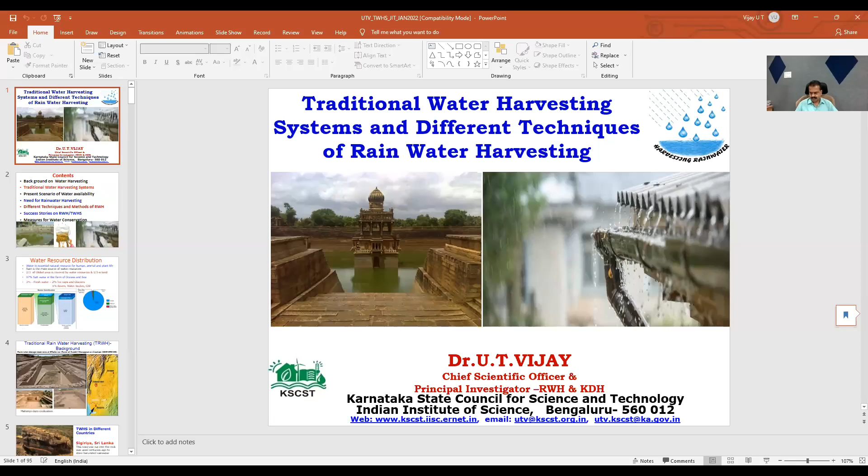Okay, thank you. So, good morning to all of you. I'm Dr. Vijay from Karnataka State Council for Science and Technology. First of all, let me thank the JIT Institute of Technology for giving me this opportunity to participate in this prestigious refresher course program.

Before starting my talk, let me introduce my organization, Karnataka State Council for Science and Technology, which is one of the first state science and technology councils to be set up in the year 1975, located in the Indian Institute of Science, Bengaluru. Since inception of our council, we have been serving the state by using science and technology interventions for the development of the state, both in rural as well as urban areas, under the main sectors of water, energy, education, health, ICT, geospatial technology, digital heritage technology, and so on.

Especially under water, we have been serving the state by carrying out a lot of field investigations, and using advanced technologies, we have been giving a lot of scientific measures and suggestions to the state in the development of both surface water as well as groundwater.

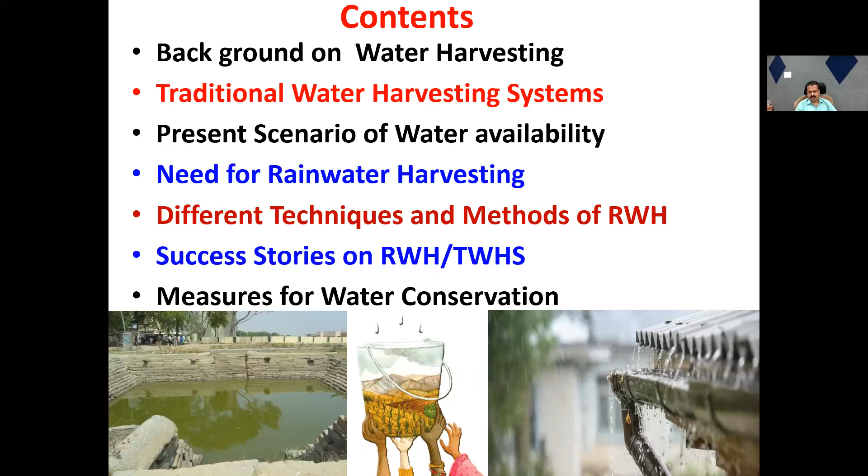So friends, as we all know, water is important and is an essential natural resource used for various purposes for all creatures on earth, both animal and plant life, including human consumption, apart from various other uses. As we all know, rain is the main source of water resource.

First, let us know the water resource distribution on our earth planet. If you see our globe, 2/3 of our area is covered by water and 1/3 is land. Out of the water resources, 97% is available in the form of oceans and seas, that is salt water only. 3% is available as fresh water. Out of that 3%, 2% is in the form of ice caps and glaciers, and 1% is fresh water available in rivers, water bodies, and groundwater. With this 3% only we have to struggle, and that too within 1% of fresh water we have to meet all our needs.

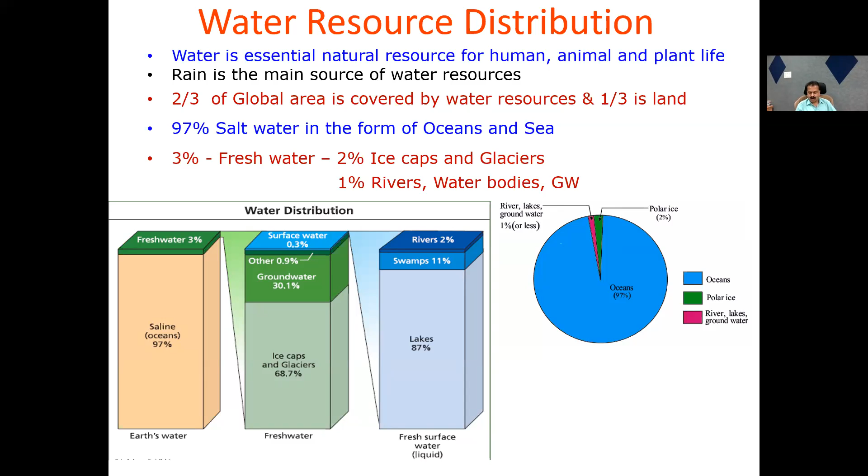If you go back to the inception of our civilization, water harvesting is not a new technology or any special or rocket technology. It's a very simple way of harvesting rainwater - whatever rain falls on your place, you catch it, store it, and use it for various purposes. It did not start yesterday or the day before; it started with the inception of our civilization.

You can see these structures, which were constructed by our ancestors in our civilization. Even today we can see this kind of structures in the Harappa and Mohenjo-daro civilization, which took place at the border of our country along with Pakistan and Afghanistan. Even today you can see this kind of structures. So these pictures show that water harvesting was present since the inception of our civilization.

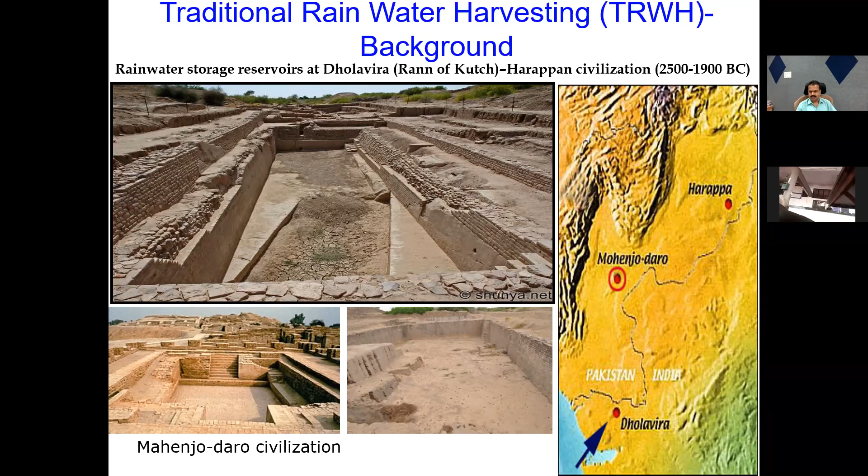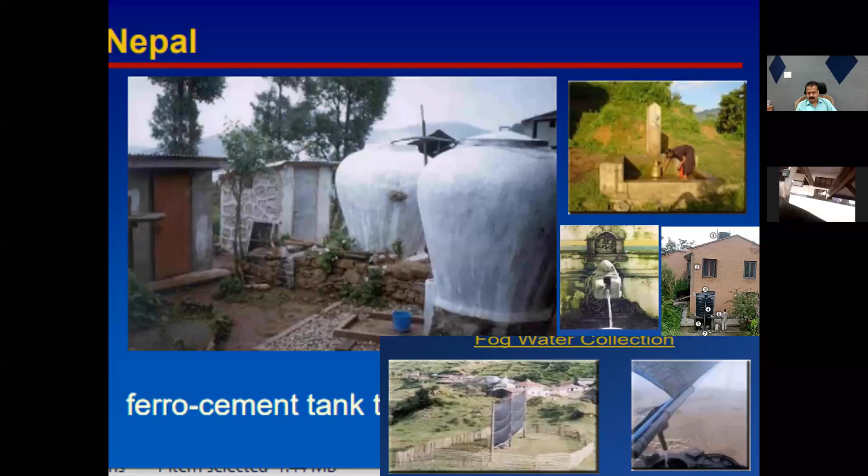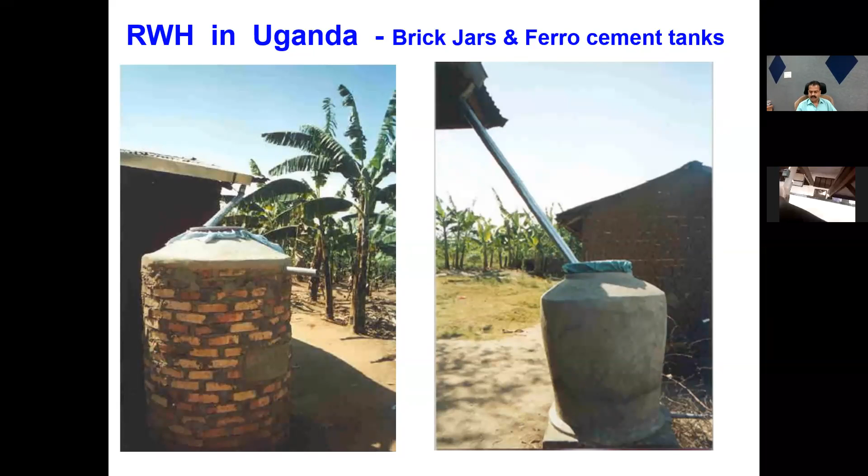In Nepal, they also used to harvest water naturally, even collecting water from fog. They used to collect water from fog and supply it to village settlements lying downside the hillocks. You can see these pictures, which show methods used by Uganda, using brick jars as well as ferrocement tanks. Earlier they also used ferrocement jars as well as wooden stems lined with lime mortar.

So let us understand what traditional water harvesting systems are. Basically, these systems were constructed to store water for domestic, religious, and irrigation purposes, along with recharging groundwater. These are environment-friendly structures constructed using locally available material with traditional knowledge, crucial to the overall ecosystem. These structures were also constructed as flood control measures, and also as monuments to showcase the richness of tradition, heritage, architecture, history and culture of the region.

The temple tanks, kalyanis, pushkaranis, or stepped wells, constructed near temples, played very important roles, especially in the social, religious, and cultural activities of our Indian tradition. Annual float festivals, Teppotsava, light festivals, Deepotsava used to be conducted as part of socio-religious activities near these water bodies. In India, this is prevalent from almost Kashmir to Kanyakumari.

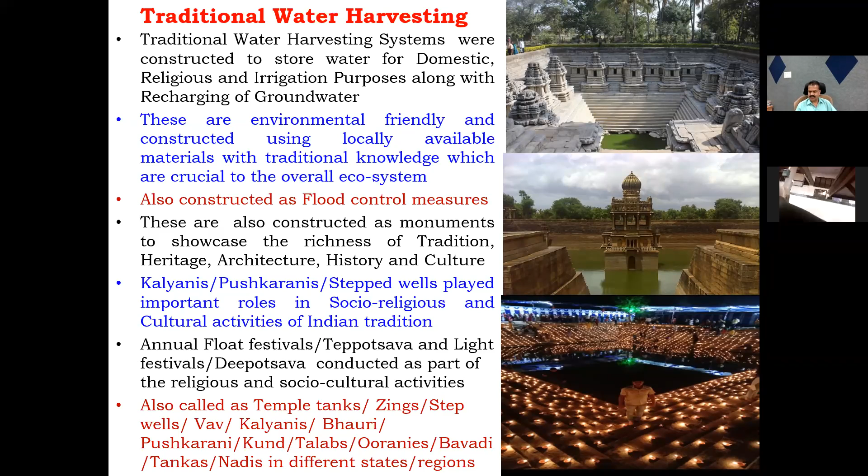These structures are called by various names - Zings, stepwells, Vav, Kalyani, Bhauri, Bauli, Pushkarani, Kund, Talabs, Ooranies, Bavadi, Tankas, Nadis - in different states and regions. You can see from this picture that it is widely prevalent in all parts of our country, starting from Jammu Kashmir to Kanyakumari.

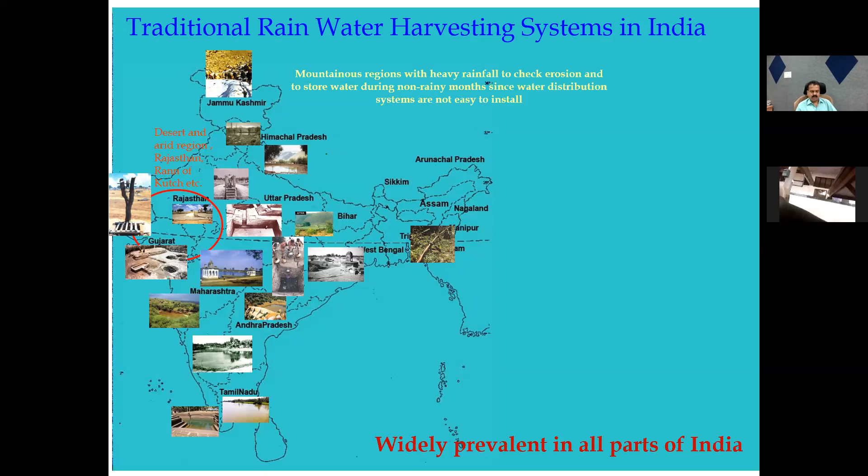Especially in Himalayan regions, they used to collect water from glaciers and store it in this type of tanks, and they used to use this water for domestic as well as irrigation purposes.

Then coming to our Rajasthan as well as Gujarat area, they used to harvest water in tankas. These were built by nomadic Maldharis who used to roam these grasslands.

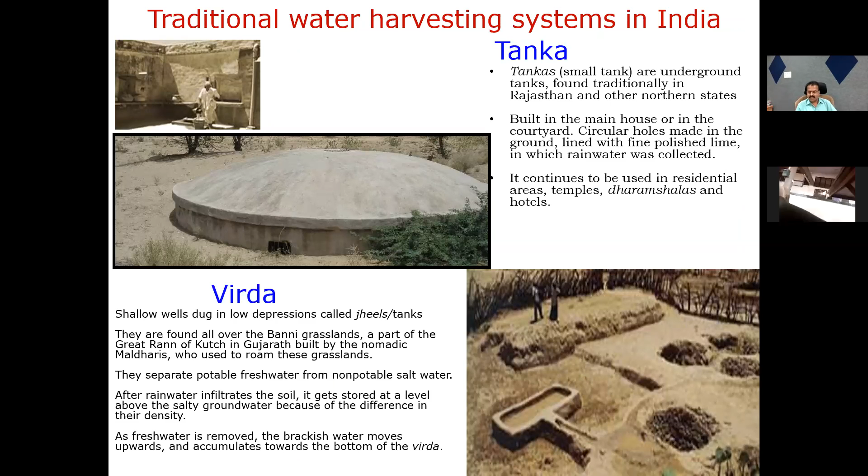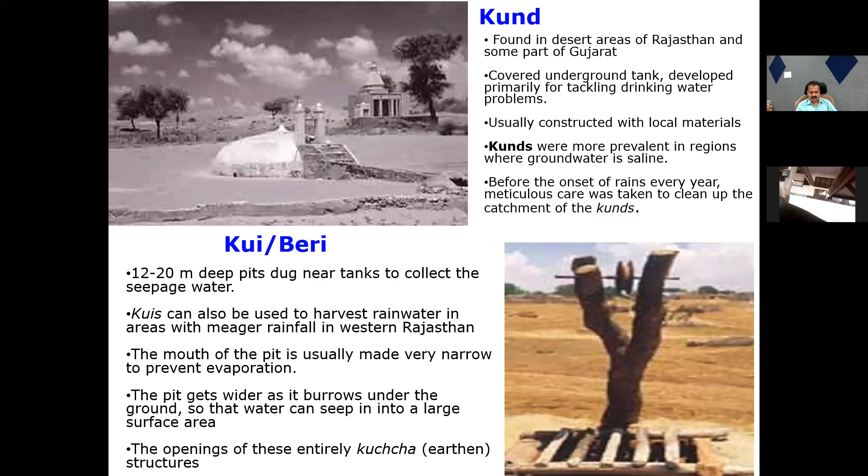Then Kund, this is also found in desert areas of Rajasthan and some part of Gujarat. And Beri, which is 12 to 20 meter deep pits dug near tanks to collect the seepage water, which is available in the form of groundwater.

Johad, which were also constructed using locally available material, either earth or clay or something, by people of Rajasthan. Then Khadin, which is found in Jaisalmer area of Rajasthan - they used to harvest water by constructing bunds to store water, which was being used for both irrigation as well as groundwater recharging.

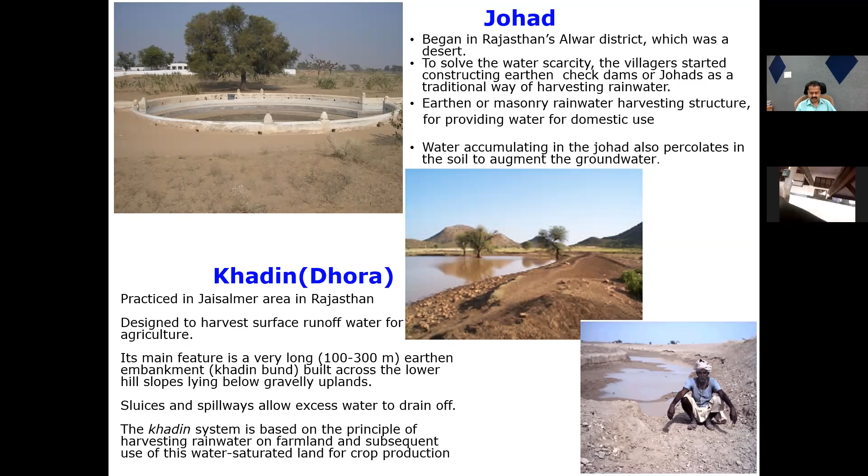Apart from this kind of surface water harvesting, they also used to construct stepped wells, or vavs, or baoli - not only to store the groundwater seepage, but also to showcase the architecture, culture, and history of the region in the form of sculpture as well as architecture. You can see this beautiful stepped well called Chand Bhauri, located in Abhaneri area, Rajasthan, which has 3,500 narrow steps over 13 stories. They used to collect huge amounts of water in this structure.

If you see this right side structure, Agrasen ki Baoli, located in Delhi - this 60-meter long and 15-meter wide, 30-meter depth step well on Hailey Road in Delhi.

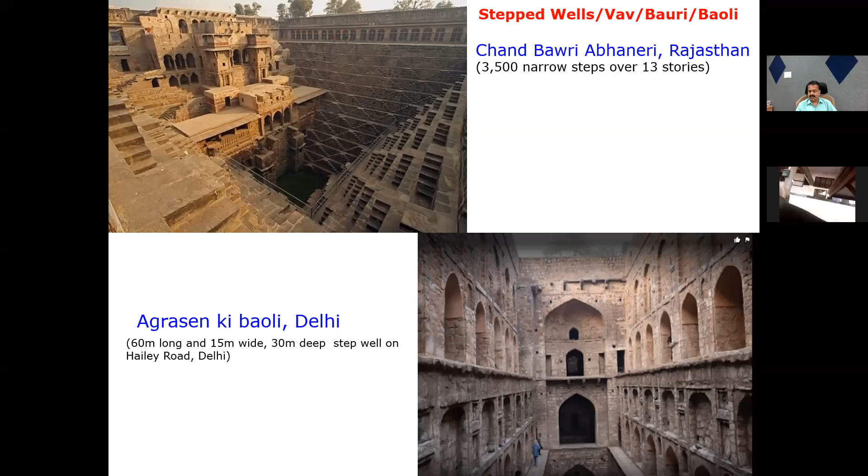You see this structure, how beautiful it is. Rani ki Vav at Patan, which is 65-meter long and 25-meter width, having 30-meter depth, is also considered one of the World Heritage Sites by UNESCO, one among 35 World Heritage Sites of our country. Constructed on the banks of Saraswati River, it was initially built as a memorial in the 11th century. It was constructed as a religious as well as functional structure and designed as an inverted temple, highlighting the sanctity of water.

This structure is located in a village called Kotale in Ahmednagar district of Maharashtra, which was constructed to tap the groundwater seepage at the bottom of hillocks. Earlier it was potable; now, with the interference of tourists, it has become unpotable. However, this water is so cold in summer also, you actually feel like you're standing in a refrigeration unit.

Of course, Pushkarani - stepped wells or kulams constructed for religious purposes near temples, using locally available materials like laterite bricks in Kerala. And these are all small traditional structures called Eri or tanks, Oorani or small tank - even called Kovil kulam in Tamil Nadu. All these structures were being used for both domestic and irrigation purposes, along with groundwater recharging.

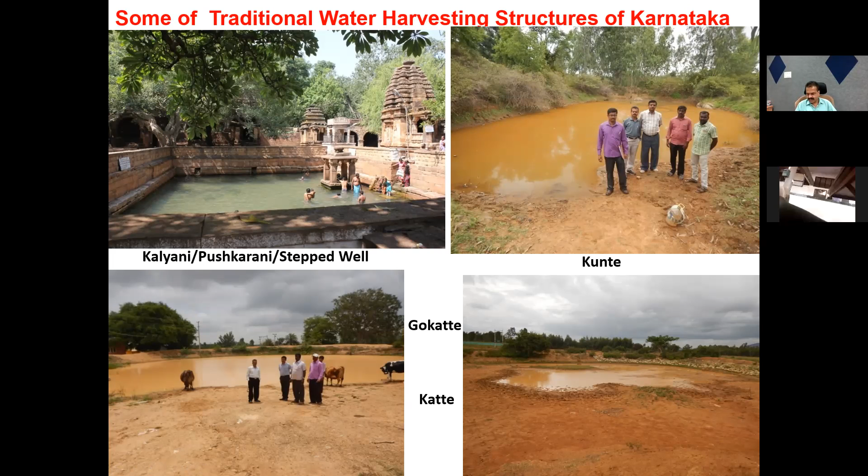Then coming to our own state, we have several types of traditional water harvesting structures. The main four types of traditional rainwater harvesting structures are Kalyani, Pushkarani or stepped wells, Kunte - which are constructed in an area of around one Gunta - and Gokatte, which are meant for drinking water for the cattle population, along with the Katte structure compared to tanks.

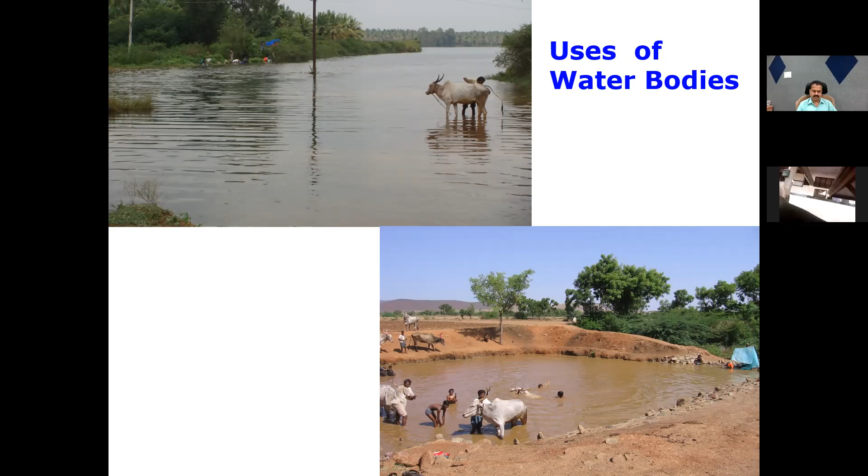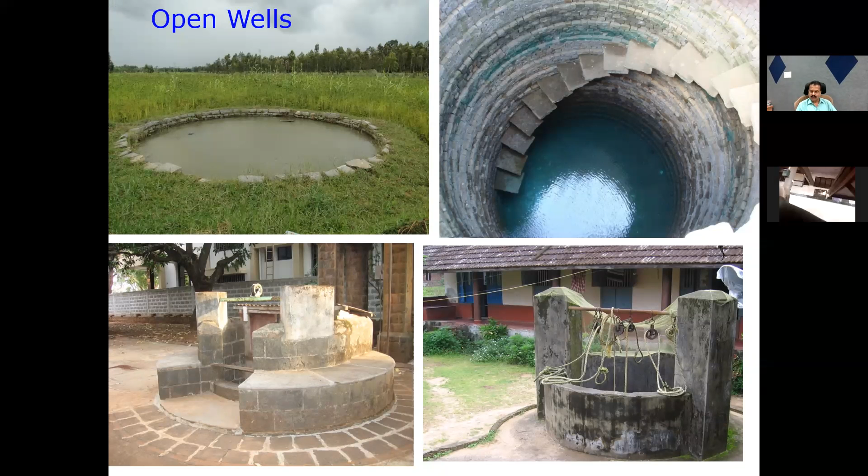Of course, as we all know, water from these water bodies is being used for various uses, including domestic use, cattle drinking, along with groundwater recharging, and even industrial purposes, and also recreation purposes. We also used to have wells even in our irrigation lands as well as in our houses, by tapping groundwater at shallow level. These are all different types of water structures used in order to tap both surface as well as groundwater.

See how much importance was given to water in earlier times. We used to assemble and gather near the water source. Along with collecting water from the source, we used to share our ideas and knowledge. There is even a proverb in Kannada: 'Oorige bandavalu neeri bartaale' - meaning if any bride or new person comes to a village, she will definitely come to the water source, that is the common well or common tap. So we used to give a lot of importance to the water source, assembling there to share our knowledge and ideas, and also conduct social gatherings, apart from religious and cultural activities near our water bodies.

See the present status of structures which were constructed by our ancestors, and how we are using them. If you see this kind of structure, it is physically intact, but see the quality of the water, see the maintenance of these structures.

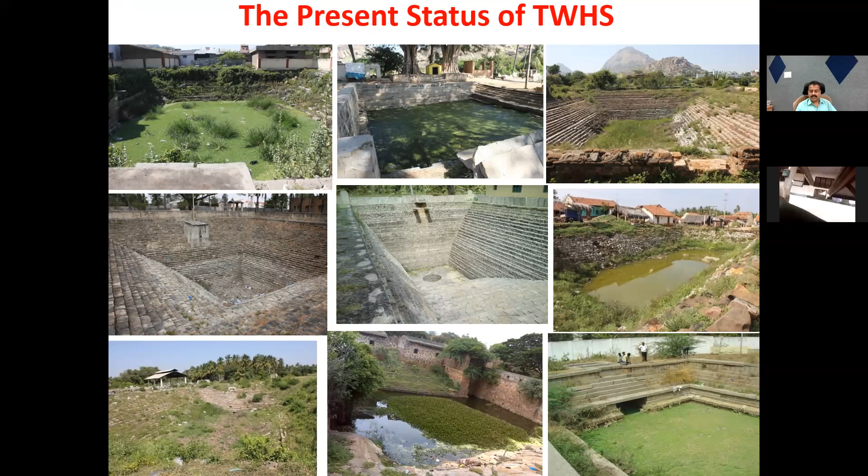Then see the condition of this tapping of groundwater. Now you can see more than 50% of our bore wells and 90% of our tube wells with hand pumps have become non-functional, dry, and almost dead.

So because of this, what is the present scenario? As per UNO declaration, there are over 663 million people still living without a safe water supply close to home, spending a lot of hours queuing or trekking to distant places to get a single pot of water. If the same situation continues, by 2030, half of our population will face water crisis or shortage.

Even if the same situation continues, by 2050, as much as 70% of our world population may definitely face freshwater scarcity.

Coming to our own India, more than 6 crore people even today are living without a safe water supply close to their homes. Coming to our own state, Karnataka, out of 29,000 villages, more than 7,000 villages are facing both quality and quantity issues, including water contamination like fluoride, total hardness, iron, arsenic, nitrate, and even uranium problems in some places.

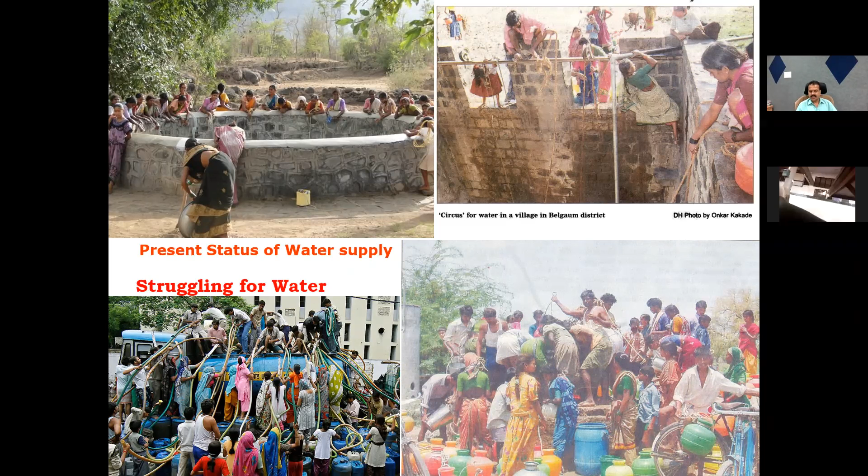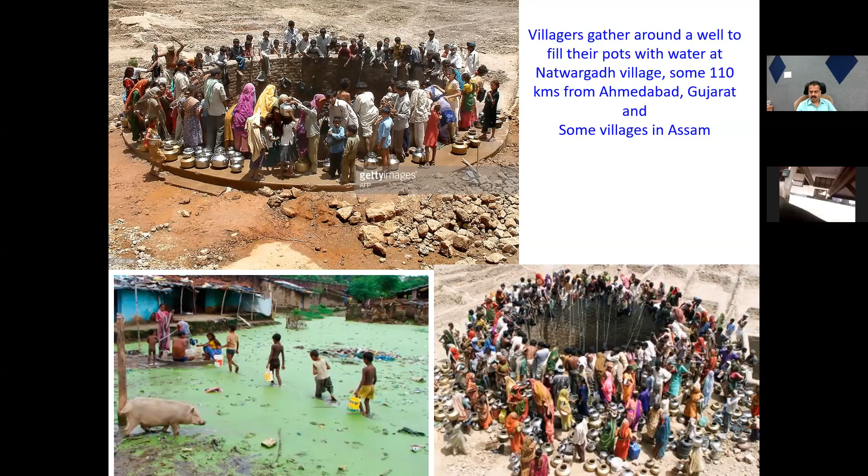So nowadays it has become almost common, either we protest or we fight for water. We fight each other for water. Fighting is there from village to village, district to district, and even state to state. So there is a joke, almost a prediction, that if Third World War takes place, definitely it's for water.

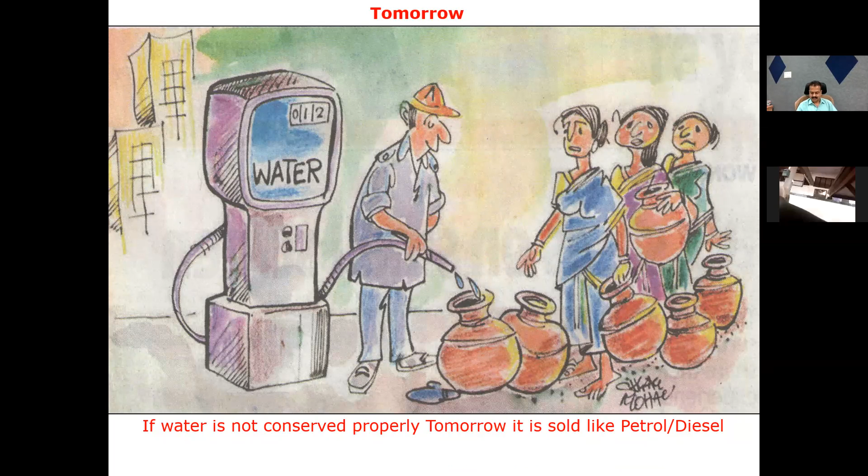If the same situation continues, definitely one day in future we may have to get our pot of water like how we get diesel and petrol from petrol stations. So then, what are the reasons for shortage of water?

Of course, as I told you, even though our globe is covered by 2/3 water resources, still we have a problem. Why? Because of population increase. Land resources and water resources come from the same thing, but we have seen population increase, then industrialization and urbanization.

Of course, ignorance and improper maintenance of traditional water harvesting systems constructed by our ancestors and elders. We can see a decrease in surface water bodies like lakes, tanks, and even many urban water bodies. We have also seen deforestation all these days.

Because of this, we are seeing erratic rainfall with space and time. Groundwater exploitation is taking place, as I've shown with the number of bore wells and hand pumps becoming dry and dead. Why? Because of change of land use and land cover, since we have changed our land use and land cover.

Then also improper water resources management, and last but not least, climate change and global warming. We can see this even in the months of December and January - why are we facing rainfall then? Definitely because of climate change and global warming only.

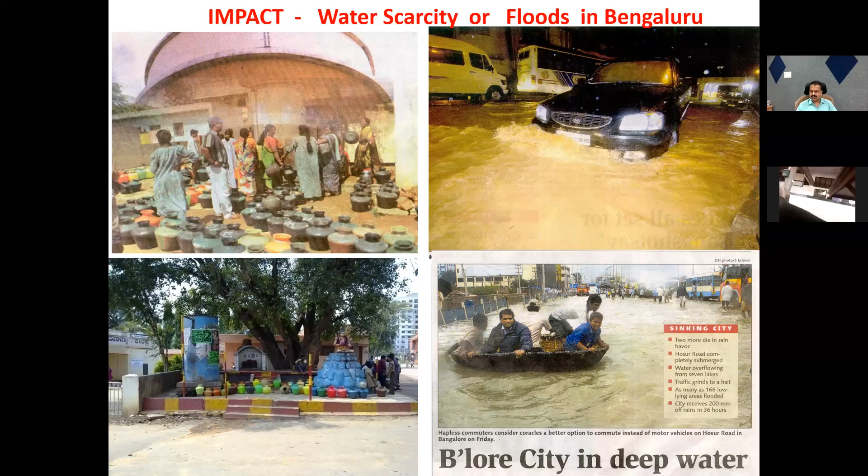What is the solution? As we know, for every problem there is a solution. What are the solutions for water scarcity? I will list some indicative solutions.

Rainwater harvesting is one of the solutions. We have potential of rain to meet water demand. Even 100 mm of rainfall, if we harvest properly, definitely we can suffice the minimum requirements of our population.

Whatever traditional water harvest systems are there, if you rejuvenate, restore, and maintain them properly, definitely we can use those structures without spending much money. We can use water from these structures for various uses, including groundwater recharge. If you maintain properly all our surface water bodies, including these traditional water systems, definitely we can suffice our purposes. Then if you treat wastewater coming from our bathrooms, kitchens, even industries, properly, you can recycle it and reuse it for various uses. And if you manage all water supply and water resources scientifically, definitely we can give solutions for water users.

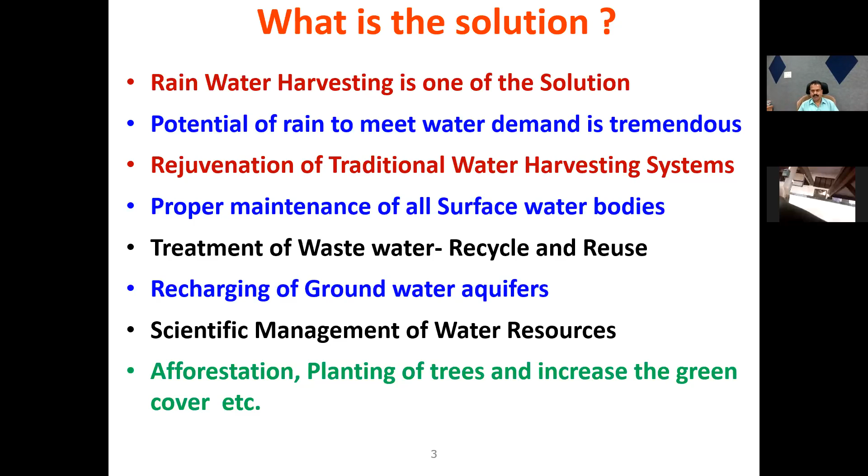So as I've shown you the present situation of our traditional water systems, our council, KSCST, Karnataka State Council for Science and Technology, took up a scientific study to assess the physical and hydrological status of these traditional water bodies, to give scientific measures for rainwater harvesting. Why? Because most of the structures are in depleted condition and became dry, resulting in a decline in their potential.

Even the temple tanks, which enjoyed protection from humans because of religious sanctity, are also under threat. Most of these structures have become dry and also became almost dump yards in both rural and urban areas. These ancient water bodies are also polluted, resulting in the water becoming dirty and unsuitable for human consumption. They are also being used for sewage disposal and dumping, and have become a home for mosquito breeding.

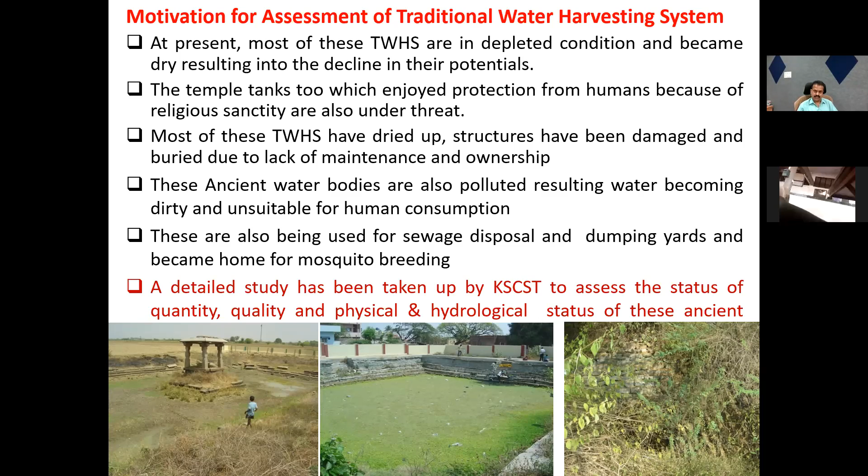With this background, we took up this study in the year 2017 and finished it in 2020. Almost 40,000 structures have been taken up for scientific study, and almost every panchayat of our state was visited by our team, where we assessed and covered all these parameters.

That is, the geographical location of this traditional water harvest system, along with the type of structure, whether it is a groundwater structure or surface water structure. We assessed its administrative jurisdiction, who are the custodians, the type of usage and reasons for disuse, and its catchment area, whether from surface water or groundwater seepage. We also assessed the physical structures like length, width, depth, etc.

Water storage capacity has also been assessed, along with the materials used for construction, and hydrological parameters of the structure like drainage network, catchment, storage area, status of silt, status of outlet and waste weir, geological and geomorphological parameters, land use land cover of the area, along with topography - that is slope, aspect, and altitude. Then soil data has also been assessed, which plays a major role in water storage, along with rainfall and climate conditions, groundwater level of the area, and status of water quality in some water bodies.

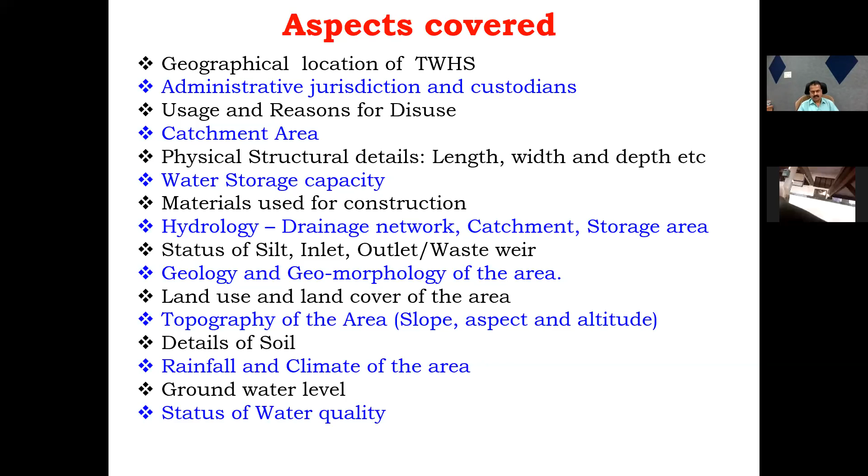All these aspects have been covered in our study. Like this, we have assessed both the physical and hydrological status of these structures in our state. We have also created around 25 parameters for each structure under a geospatial environment - that is called a Geographic Information System. We have created around 25 parameters as an attribute database.

And also, we have taken the geographic coordinates and created the spatial data of those structures. We have superimposed or overlaid this on various thematic layers like drainage network, surface water bodies network, soil, topography or slope, geological, as well as hydrogeomorphic parameters.

So we have assessed it in an integrated way, and given scientific measures for rejuvenation of these water bodies. We have also created district-wise, taluk-wise, and state-wise locations of water bodies by integrating all these thematic layers. If you click on any symbol in the GIS environment, it will give you its present photograph along with the around 25 parameters pertaining to that particular water body.

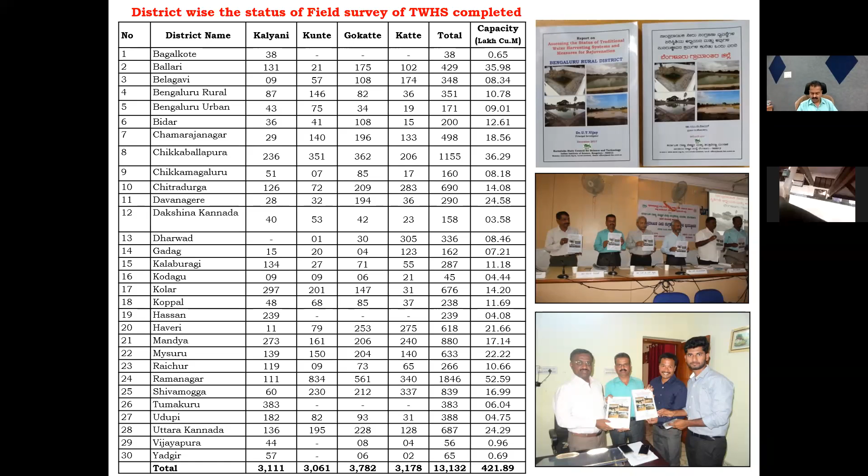Fortunately, these structures have been taken up by our state as well as district administration under various schemes such as MGNREGA, the National Rural Employment Guarantee Program, Jalamrita, and even the new program given by our Honorable Prime Minister of India, Catch the Rain, Jal Shakti Abhiyan. All these structures have been taken up for rejuvenation, desilting, and restoration under these schemes.

These pictures show the present condition of the traditional water structures in our state. What is the summary of our observation? When we studied around 13,550 traditional water harvesting structures, we found around 25% of our structures are in good condition or under use. Around 35% of the structures are not under use, even though they are in good condition, due to various reasons.

Around 20% of the structures are in bad condition, wherein structures are damaged or collapsed, and we could find no proper inlet or outlet, because for any surface water structure, there should be some outlet in order to drain off the excess water above the maximum water level.

Around 40% of structures have no water. Some 60% of structures have water... no, have no water due to various reasons, including depletion of groundwater also, maybe. Around 30% of structures are polluted with physical as well as chemical components. This is what we have assessed.

Most of the structures are filled with silt. In 90% of the structures, we could see a lot of silt deposit, which has resulted in the decline of the storage capacity of the structures.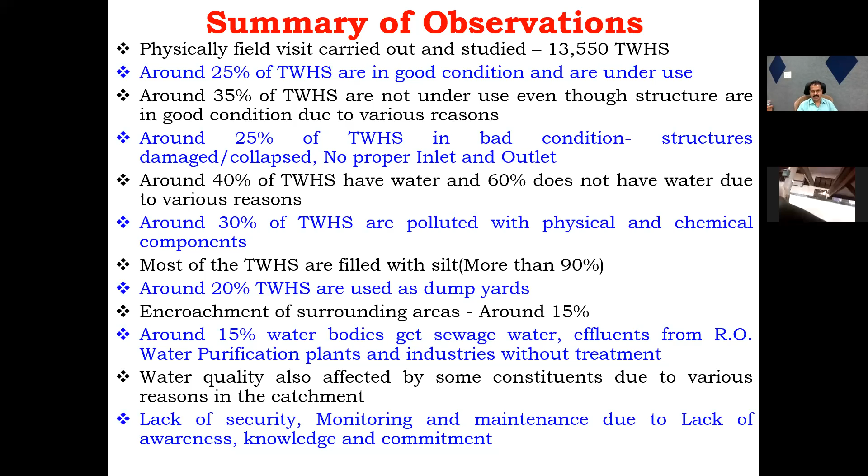That is, clean the inlet and feeder channels. This is very important because the inlet and catchment area are very important, and bail out the contaminated and stagnant water to store clean water. Remove the weeds, algae, garbage, bushes, and slush accumulated in the water bodies to maintain cleanliness.

Then, provision of proper silt traps for inlets and feeder channels should be made, along with a proper outlet wherever it is not there. Desilting is the most important activity to be carried out at regular intervals, in order to enhance water capacity as well as to maintain the good quality of water.

We have also given measures for restoring damaged and collapsed steps, side walls, and stone pitching wherever damage has taken place, and for providing proper outlets to allow the runoff. This allows stored water more than the maximum water level to flow out, and should be made to allow runoff and surface water flow during rainy days. We should give provision for that.

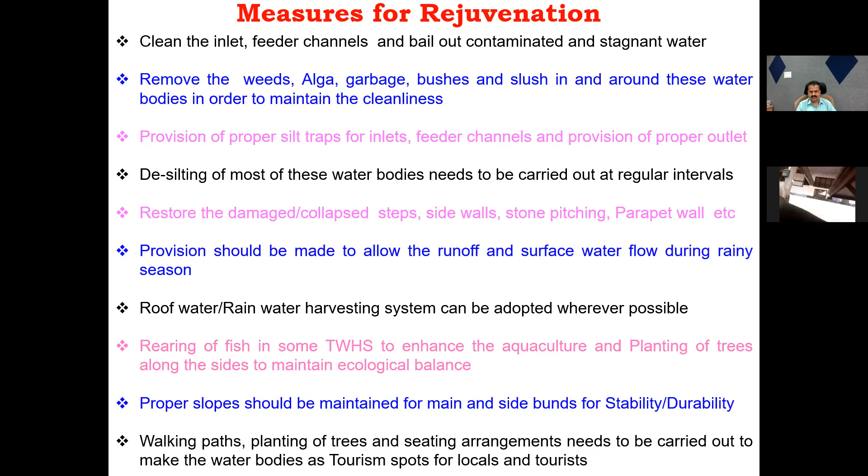As the impact of our study, these structures have been taken up by the district administration for rejuvenation. These pictures show how these structures have been taken up for rejuvenation. Earlier it was like this during the rejuvenation work, and this picture shows the present situation. At least it's cleaned up and water storage capacity has also increased.

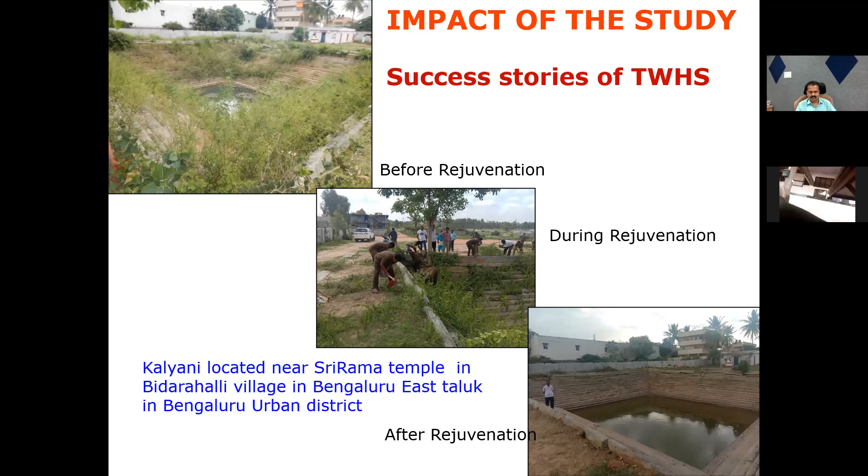This Kalyani or stepped well is located in Bidarahalli village in Bengaluru East Taluk of Bengaluru urban district, with a beautiful octagonal shaped Kalyani located near Chikbalapur Taluk, which was also like this earlier when we visited. Based on our report, the structure has been taken up with fencing, cleaning, and even desilting. See, now it looks like this.

This structure is located in Tumkur district of Koratagere Taluk. This kind of stepped well, Pushkarani or Kalyani, will be having one more well within the water body, because in order to ensure even water availability during summer season, 90% of the structures will definitely be having this kind of well within the water body.

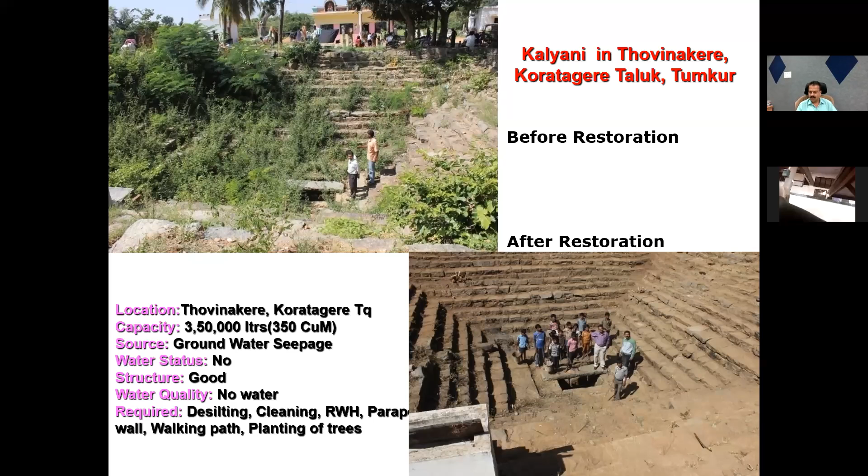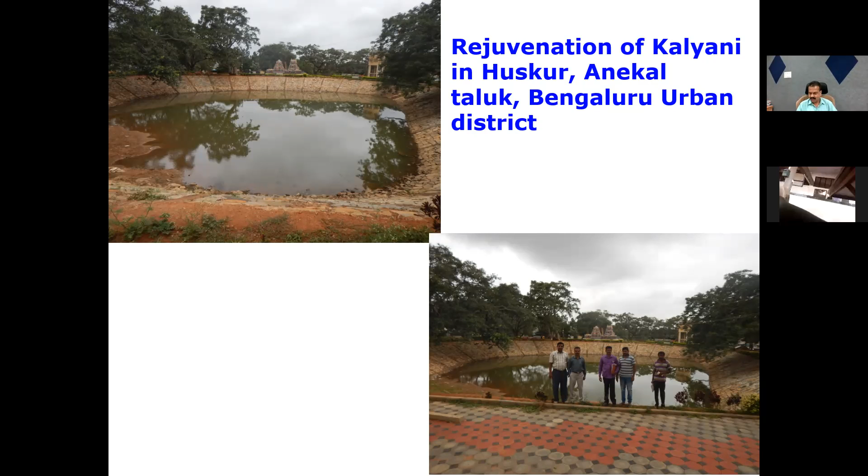As I told you, many structures which are in the vicinity of urban areas have been developed as tourism spots by having walking paths, seating arrangements, and planting of trees. So a lot of visitors and locals can come and spend time. And if you plant trees, it will minimize the evaporation losses of this water body. Also, it will become home for many birds to come and sit in these trees. Like this, if you develop any water body, it will definitely balance the ecology and environment of the area.

These tanks have been taken up for rejuvenation in Chamarajanagar district. This was the before condition, and these are the photographs after rejuvenation of this water body.

Coming to the second solution, that is rainwater harvesting. Let us see what rainwater harvesting is. As I told you earlier, it is the systematic collection of rainwater to be stored for various future uses, including groundwater recharge. The main concept is very simple: collect what falls on the surface as well as on the roof of your area, store it properly, use it for various purposes, and recharge the excess water. The main three steps are: collect, store and use, and recharge. This is the very simple concept involved in rainwater harvesting.

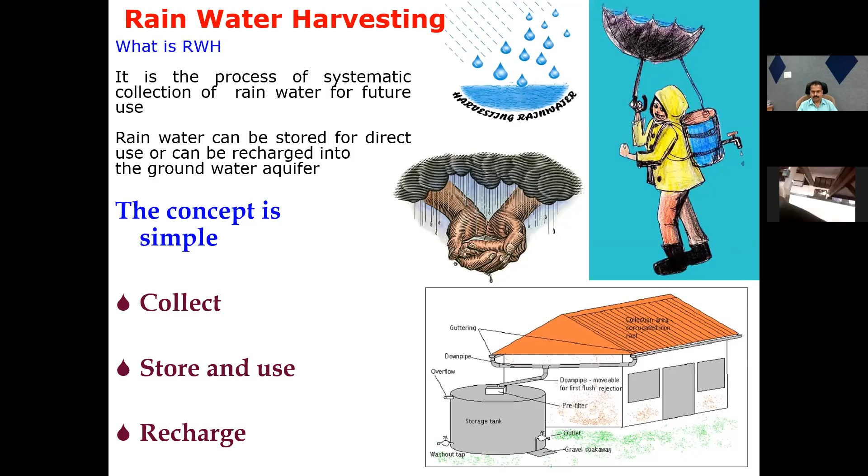Very important steps involved in rainwater harvesting are: collection, whether from roof, surface, or open air; store it, channelize it, convey it, or filter it properly; store it; and allow excess water to be discharged as outflow from your storage structure.

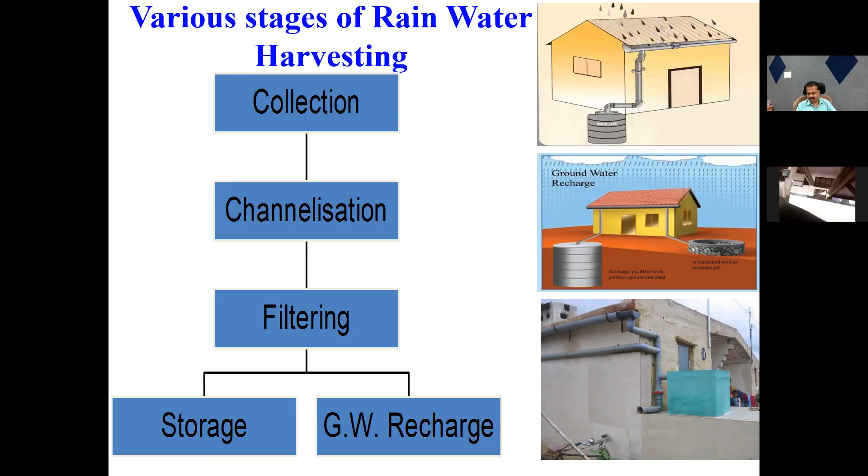It's a very simple process of collecting water from the rooftop as well as from the surface. Even if you tie a clean sari or dhoti, you can store this water, either in an earthen pot or even a small bucket. Even if you store it on top of your toilet, you can use it naturally without any pump, without any of that — naturally you can use this water.

There are three major types of rainwater harvesting. One is rooftop rainwater harvesting, another is surface water rainwater harvesting coming from your landscape, parks, stormwater drains, and road surfaces. The third one is natural collection of stormwater flowing in natural streams, drains, or catchments of groundwater discharge, such as Kalyani, ponds, tanks, Ooranis, and so on. These are the three main important types of rainwater harvesting.

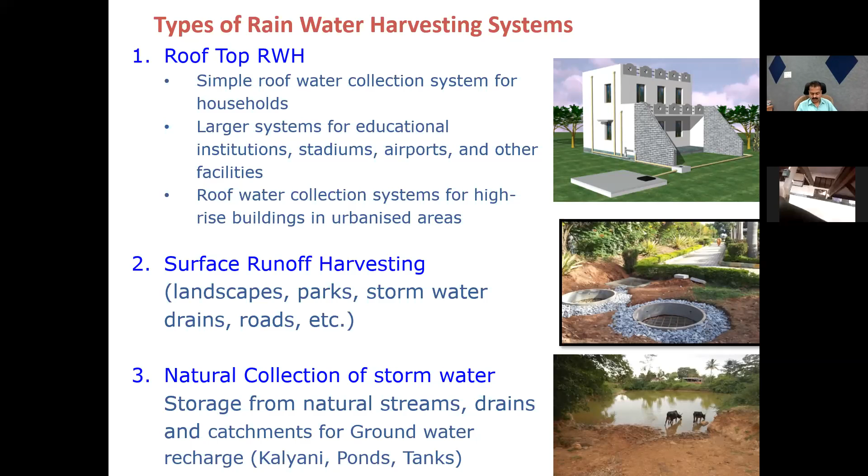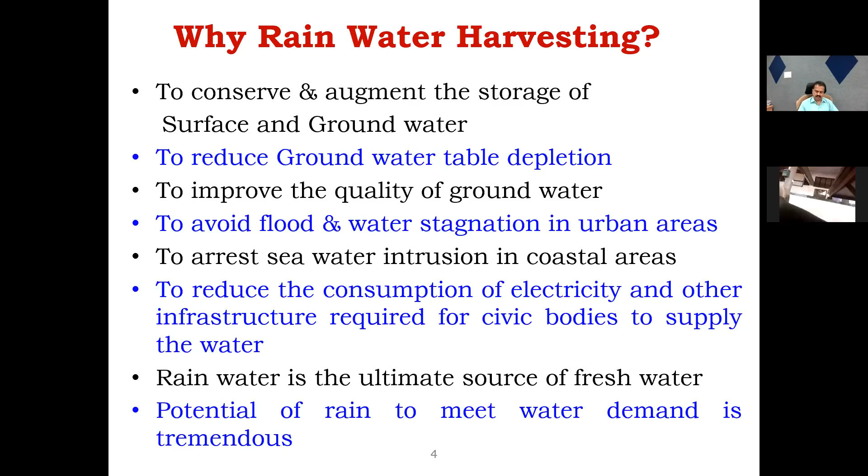If you see why rainwater harvesting is required: to conserve or augment the storage of surface and groundwater, to reduce groundwater table depletion, to improve the quality of groundwater, and as I told you, rainwater harvesting is one of the measures for flood mitigation, to avoid flooding and water stagnation in urban areas. Also, to arrest seawater intrusion in coastal areas, and to save the consumption of electricity and other infrastructure required for civic bodies to supply water to our urban population. Rainwater is one of the ultimate sources of fresh water; we have the potential of rain to meet water demand for various uses. This is why we require rainwater harvesting.

What are the important components of rainwater harvesting? If you take rooftop rainwater harvesting or surface water harvesting, one is your collection area, that is the catchment area, whether it is roof, surface, playground, or road surface. If you take roof, we have flat roofs as well as sloping roofs. Then conveyance or transportation is either through pipes or channels, with some minimum filtration required. Then storage, then excess water can be recharged through wells, open wells, or bore wells. These are all the important components: catchment area, transportation, filtration, storage, and groundwater recharging.

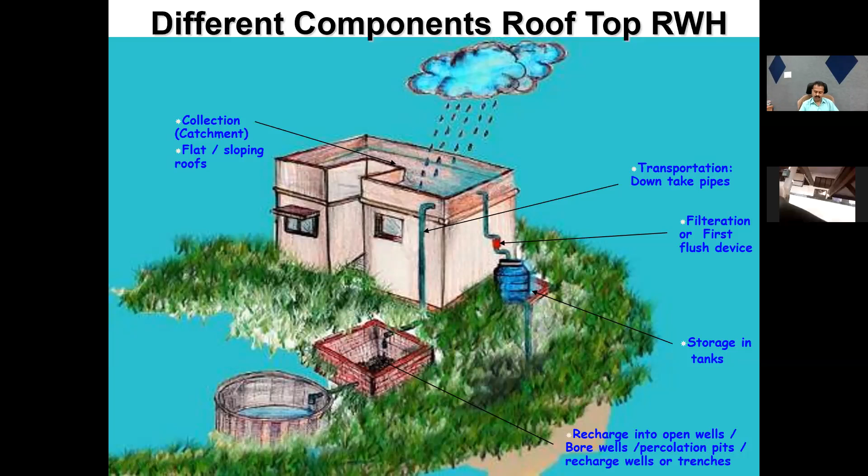If you see the different types of components one by one, the first one is roof or surface. If you take roof water harvesting, we'll be having two types of roofs: one is flat roof, like this.

The second one is slope roof, depending upon different materials that I will be showing in the future slides.

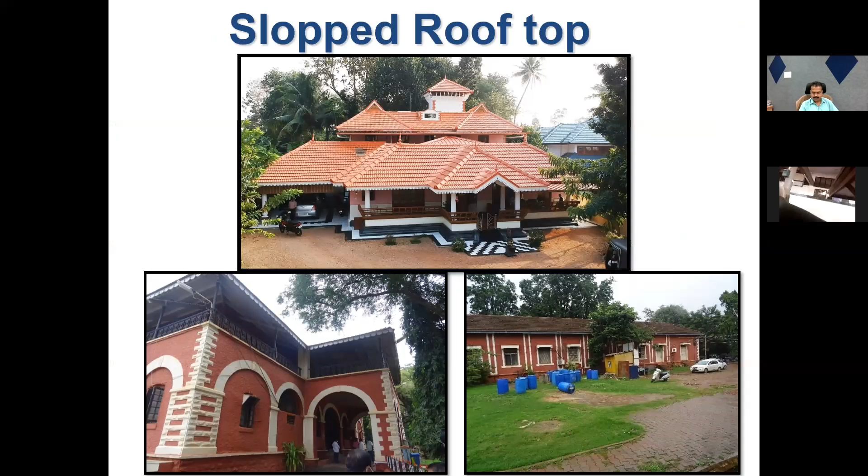What are the different types of roofing materials? Definitely RCC roof is there, ACC, asbestos, galvanized iron, fiber, asphalts, wooden shakes and shingles, slates, even some clay tiles along with Mangalore tiles. These are different kinds of various materials being used for roof of our buildings.

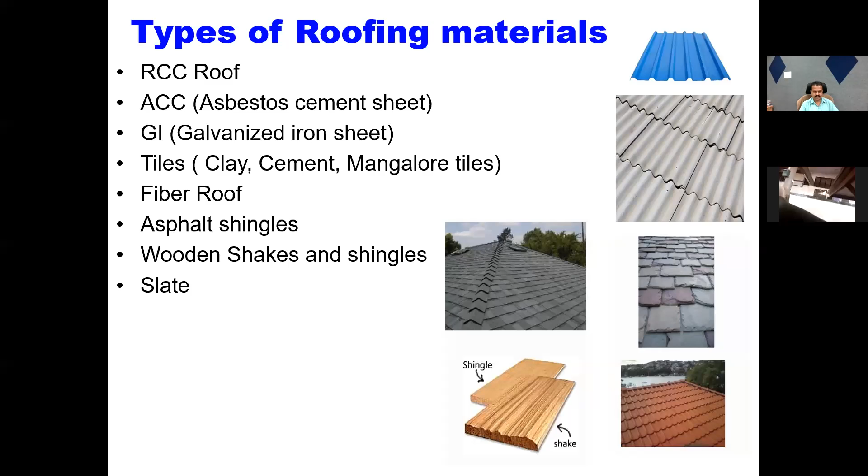After catchment area or your roof, channelization is also very important. There are two types of channelization to convey the water from our roof to storage tank: either through gutter or through pipes. If it is from sloped roof, gutter is being used, and if it is from flat roof, pipes are used for conveyance of the water from roof to storage tank.

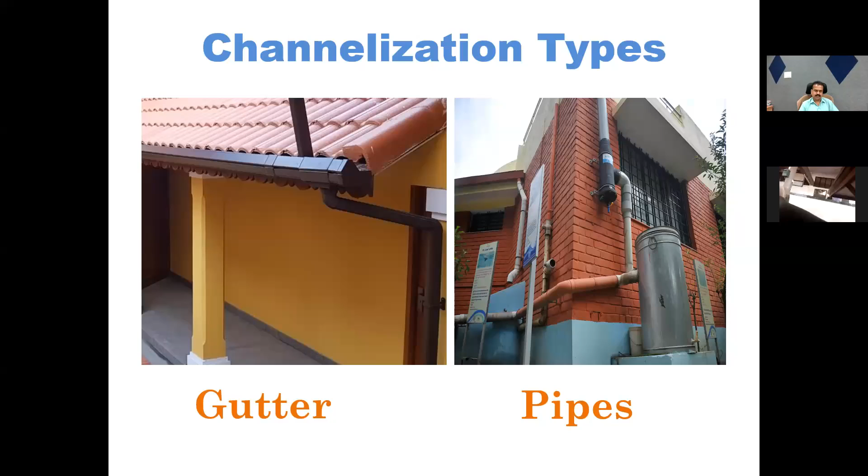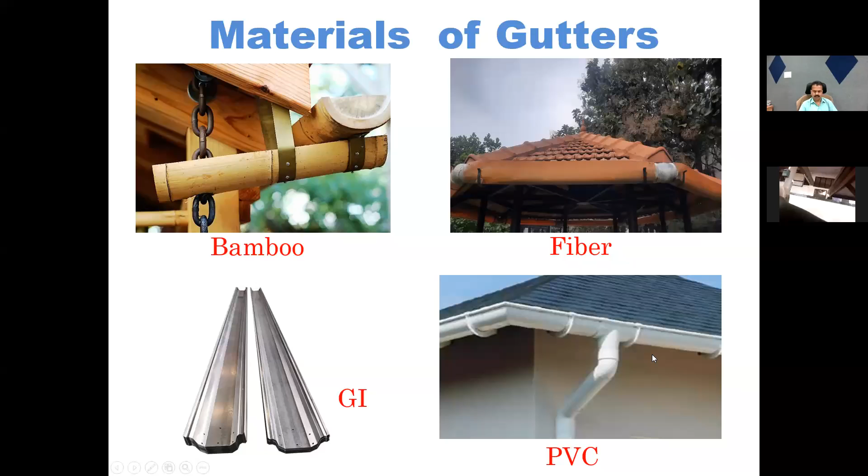Let us see the different types of gutters. They are available in different shapes: semicircular, U shape, rectangular, trapezoidal, even V channel also. If you see the different kinds of materials, bamboo materials, which is available locally in some places, then fiber gutters for sloped roof, and GI gutters, PVC, many kinds of gutters are there to be used for conveying of water from roof to storage tank.

If you take pipes, stone, earlier we used to have stoneware pipes, then wrought iron, PVC, AC pipes, cement pipes, cast iron, GI, copper, stainless steel. Depending upon your usage, you can use different kinds of materials like this for conveying water from surface to storage tank. If you take apart from collection, conveyance,

you should have some filtration media in order to filter some physical impurities. There are two kinds of filters: one is wall mounting filter, as well as to be constructed on the surface. Wall mounting filters are being used for domestic use or up to some extent, up to some 10,000 liters capacity of rainwater harvesting. We can use this kind of materials.

See, one thing we should keep in our mind. These wall mounting filters can be used only for some rainwater systems, till some small structures to medium structures, especially domestic structures. We can use this kind of structures. And also we should see that these filters will only filter physical impurities. This will not clean any chemical contaminants. This will clean only physical impurities which are carried by water from the surface, your roof surface.

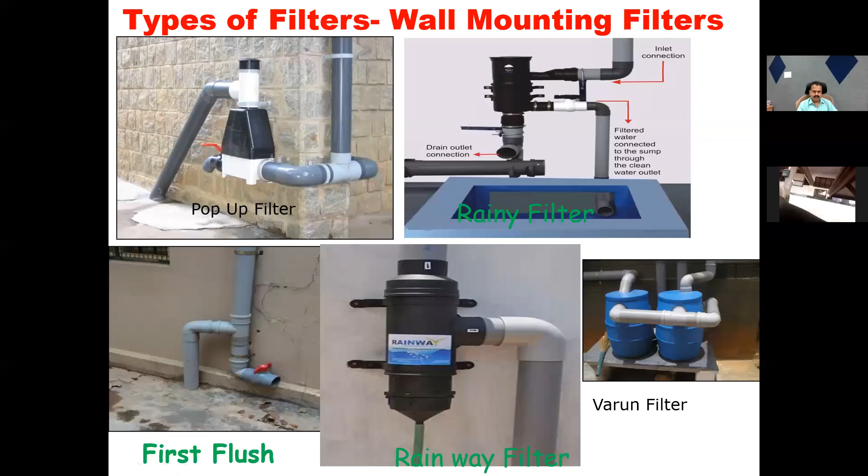Then also, depending upon your usage, you can go for sand bed filter or pebble bed filter, with three different layers like pebbles or big size aggregates, coarse aggregates or some fine aggregates, and along with sand, separated by different nylon sheets, which can be used for cleaning after usage. If you allow water from inlet, it will filter through this media, this sand, fine aggregate and coarse aggregate. You will get some filtered water from this filter media, from your sand bed filter or your pebble bed filter.

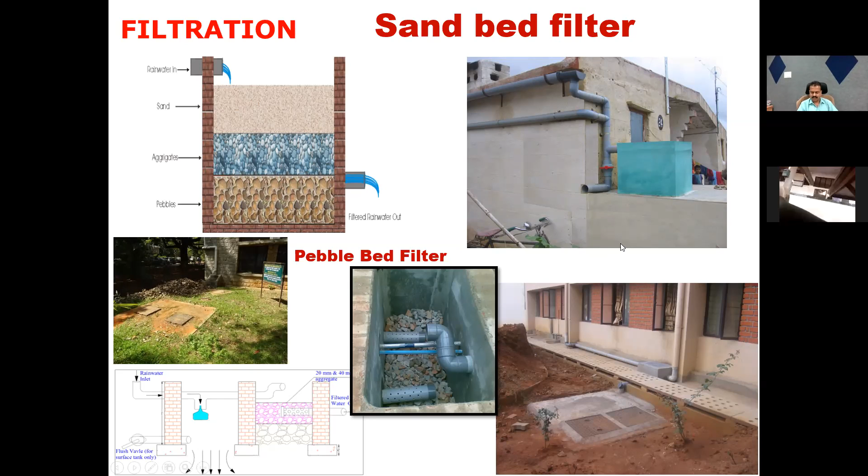Depending upon your type of storage tank, either a sump, underground sump, or your surface storage tank, this kind of structures can be constructed based on the site condition. Then coming to the last and important component of rainwater harvesting, that is storage tank. We can go for ground level or surface tanks, and also we can have even underground sump, depending on your site condition. You can go for either surface tank or underground sump.

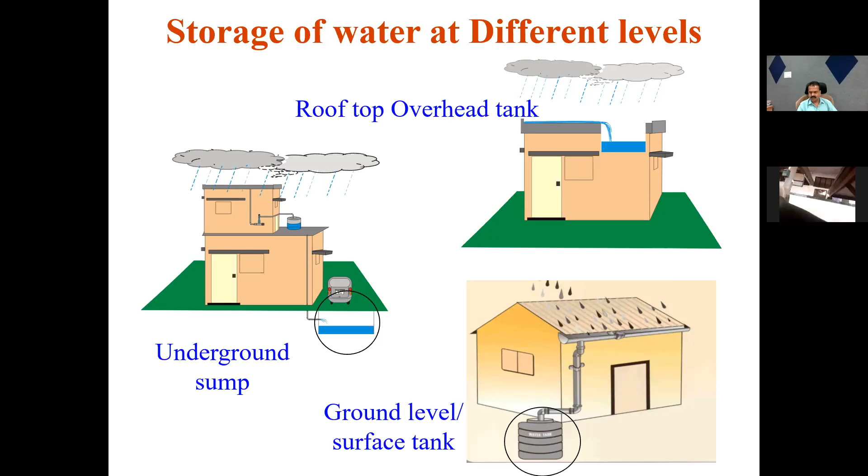Even if you have different levels in your building, you can go for constructing storage tank at different levels in order to use this stored water for the downstream bathrooms or toilets using gravitational force, using natural gradient without any power for pumping water from storage tank to overhead tank. Depending upon your structure and usage, you can go for this kind of storage tank at various levels. It can be constructed.

For example, see, this is one Raitha Samparka Kendra where the storage tank is being constructed above the toilet, and water from this storage tank is being used naturally without any pump. This is how you can plan depending upon the site condition. Even here also, for the ground story buildings, definitely you can use this water from this storage tank without any pump.

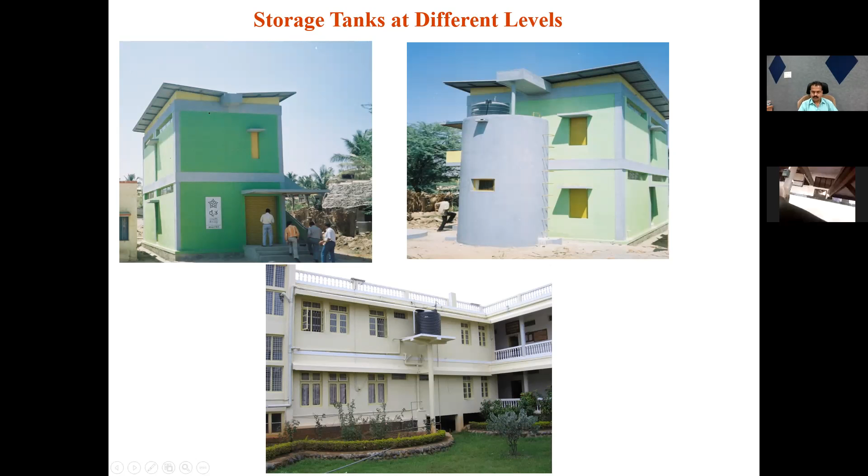You can see different materials being used for storage tanks depending on availability - earthen, plastic, fiber, metal, even HDPE, ferrocement, cement concrete, brick masonry, even brick masonry with lime mortar, wooden stems with lining of lime mortar, and in some places even wooden tanks with lining are used for storage of rainwater.

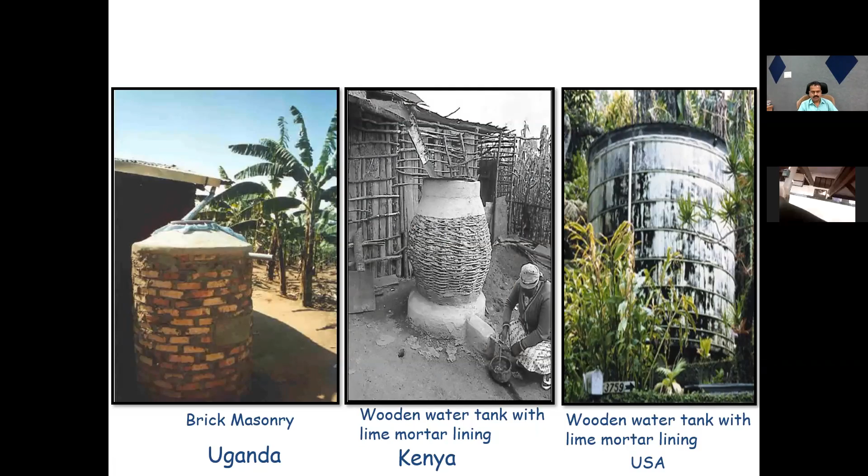These storage tanks can be used for various purposes depending on site conditions. One thing we should keep in mind: when you store rainwater in a surface tank, we should not allow the outlet air vent to stay open, because keeping it open for light and air will definitely cause the water to get polluted.

In order to prevent this, the tank should be tightly covered - it should be air free as well as light free, so that light does not pass from downwards to upwards. You should keep the air vent covered like this, not open like this. If you maintain these structures air free and light free, you can definitely store rainwater for a longer period.

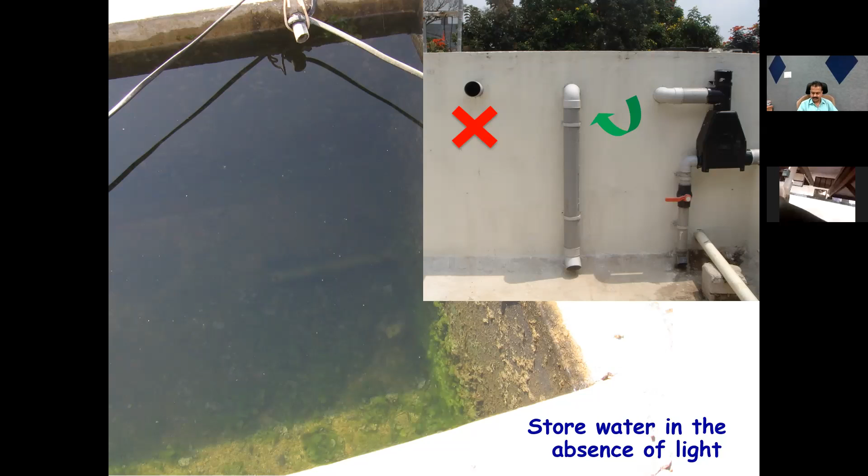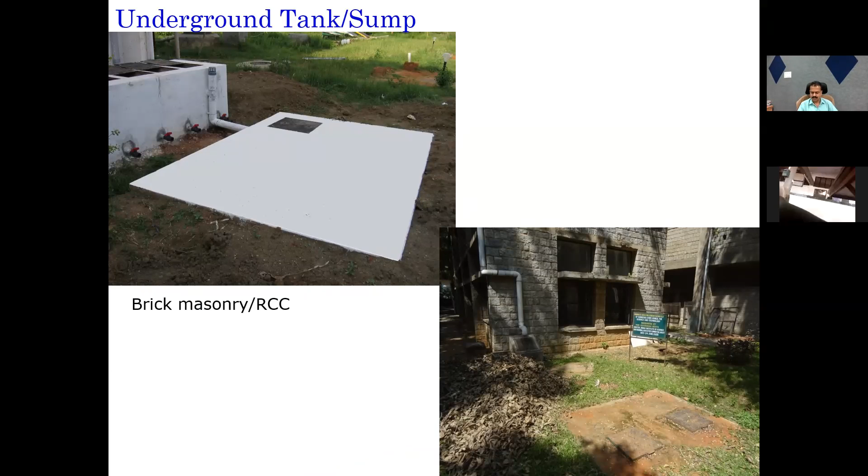Apart from surface tanks, we can go for underground sumps like this, using different materials such as brick masonry, stone masonry, or even RCC. Even brick masonry with lime can be used for these kinds of structures, depending on your usage pattern and site condition.

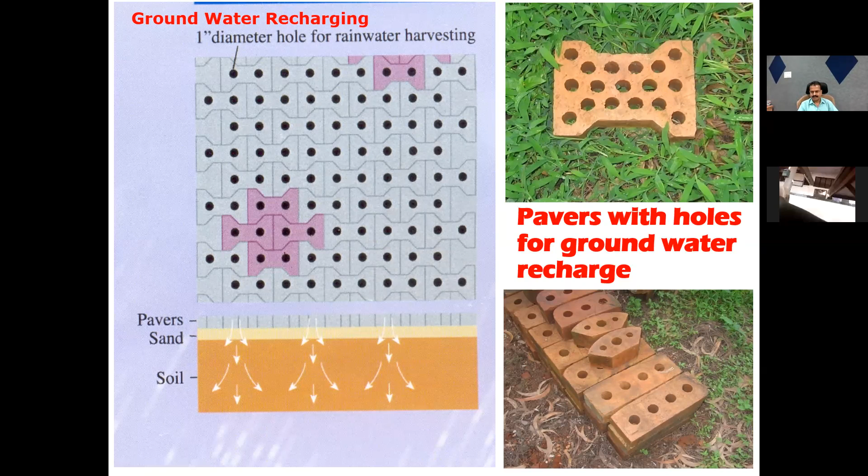Coming to groundwater recharge, there are a number of pavers available with proper holes which can be used for groundwater recharging on walk paths, roadsides, and even in parks. These are different perforated pavers available in the market for groundwater recharging. We can use these perforated pavers with holes, and even stone slabs with open joints, as groundwater recharging components on road surfaces, walk paths, parks and playgrounds.

We have given this kind of technical design to around 600 parks in Bengaluru city. Any rainfall that falls on walk paths can be stored for usage, or allowed to recharge the groundwater through silt traps like this, and stored for groundwater recharge.

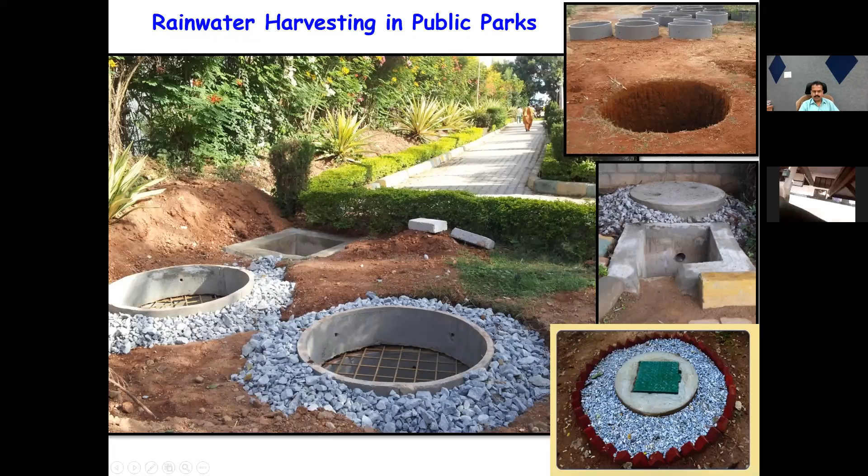We can also use dead wells and open wells for groundwater recharging like this. And we can also recharge bore wells using rainwater coming from either the roof or the surface.

One thing we should keep in mind - please don't use a pit kind of structure for rainwater harvesting around the bore well, because it may block the micro holes of the bore well after the casing pipe. That is why we suggest going for a silt trap instead.

Allow the water coming from your roof and the surface to pass through, letting the silt deposit like this, and allow the clean, filtered water to go to a recharge well, and from there to the bore well. If you recharge like this, your bore well will be recharged successfully.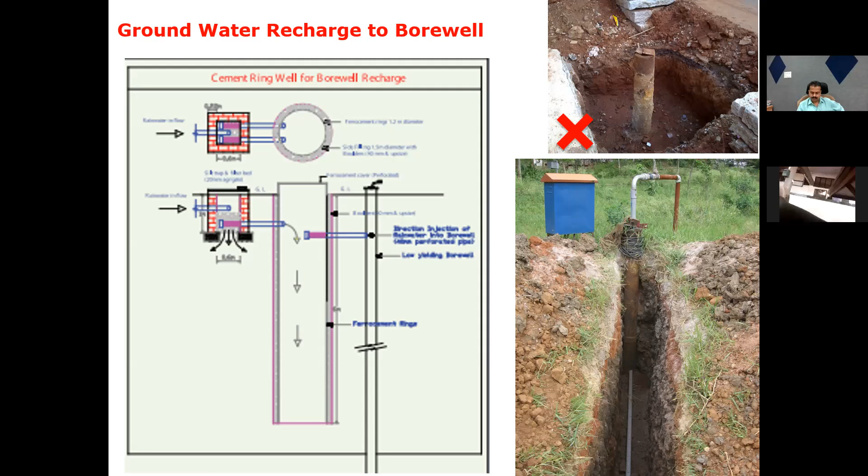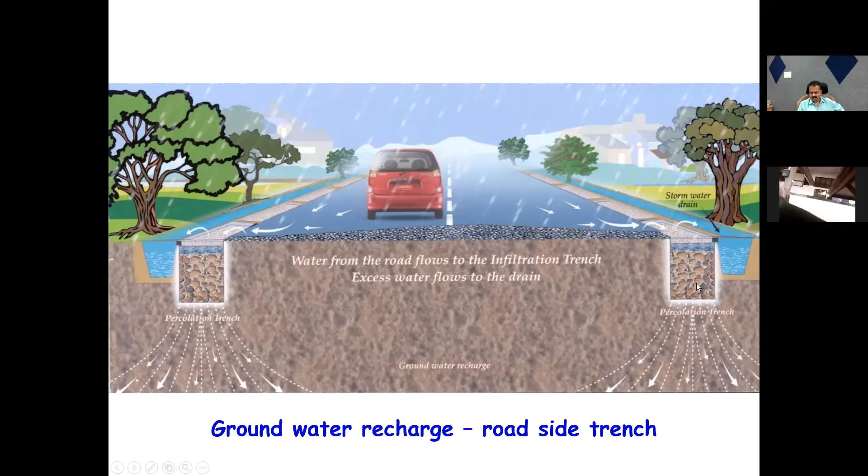We can also go for groundwater recharging along the road surface using infiltration trenches like this, coming from the road and flowing out. If you allow percolation trenches like this, your groundwater will get recharged. If you construct infiltration trenches at different intervals, about 3 to 4 feet depth, 2 feet width, and some 4 to 5 feet depth.

If you fill these trenches with boulders, waste materials, and aggregates like this, then fill with coarse aggregate and fine aggregate with sand, and close it with a mesh like this, whatever water flows in the drain can be allowed to percolate and recharge the groundwater.

Since this water is already flowing in the drain, if you install infiltration trenches at regular intervals, you can allow the water to percolate through these infiltration galleries for groundwater recharging.

As part of dissemination and promotion of rainwater harvesting technology, KSCST has set up a rainwater harvesting help desk and also a rainwater harvesting cell, active for almost 15 years in KSCST at the IISc campus Bengaluru. We have been supporting government, private, multinational, and various organizations and institutions to take up rainwater harvesting, technically supporting them by giving a detailed project report.

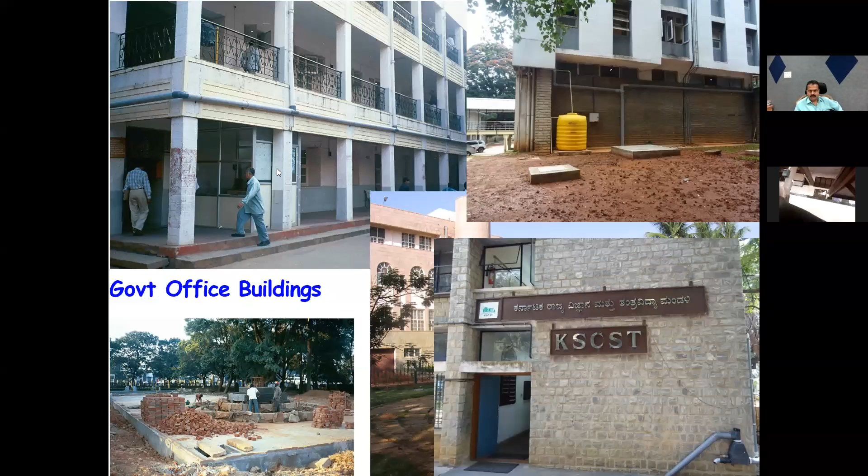Then, of course, the main administrative office of Bengaluru city, BBMP - there we also supported them to go for rainwater harvesting like this. And of course, this is our own office; we are also using rainwater for various uses including gardening and flushing in our toilets. We have been using it for almost a decade.

Definitely, we can take up rainwater harvesting in apartments also. This shows one of the apartments, and we have also supported the Kengeri BDA Workers Association complex.

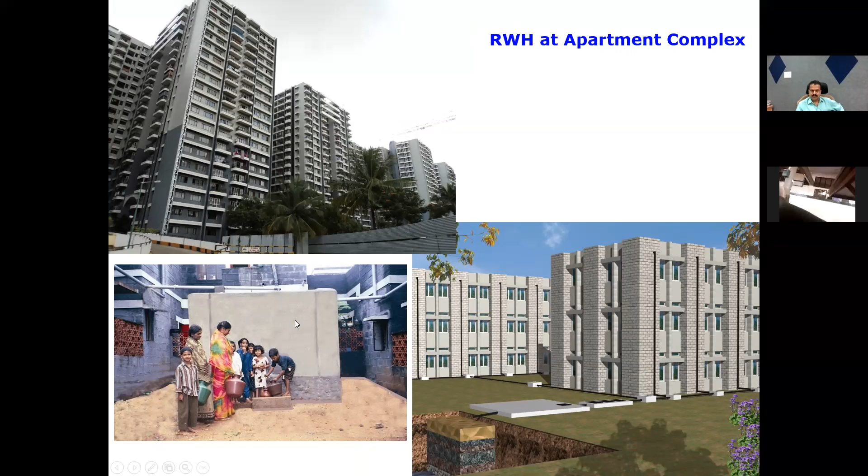Even domestic houses can go for rainwater harvesting using locally available materials. See, this half-cut bamboo is used as a gutter instead of PVC, like this.

This is Yendattur, one of the villages - almost 80% of houses there have rainwater harvesting, in Mysore district. This is from one of the villages in Koppal district, and this is from another village in Mysore district. Like this, we have supported both urban as well as rural areas.

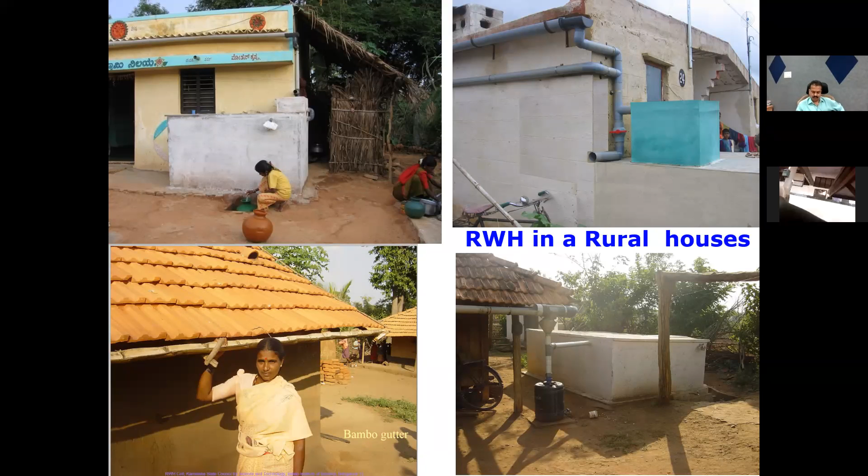Rainwater is also being used in rural schools. Around 23,000 schools have been supported by KSCST through the Rural Development and Panchayat Raj Department, constructed by the respective Nirmithi Kendra for the respective district administration. This rainwater, collected from the rooftops of schools, is being used for the midday meal scheme, washing utensils, plates, cups, and tumblers used by school children.

This has been one of the successful programs, but nowadays, because of improper maintenance, some 25 to 30% of schools are not using rainwater for their needs. So the maintenance of rainwater harvesting structures is very important. In the last slide, I will show measures for cleaning and maintenance of rainwater harvesting systems.

Then, how to calculate the yield of roof water? If you have a roof like this, you should divide the whole roof into different grids, depending upon the shape. Assess the roof yield based on the shape of the grid - either square or rectangle, X into Y - that will give you the area. Then the rainfall, if you take that into account, will give you the yield. Area into rainfall gives you the roof yield.

If you have a sloped roof like this, the area has to be multiplied by the extent area of the slope as well as the width. Instead of X and Y, you should multiply a and y, that is the extent area of the slope. That will give you the roof area of your sloped roof, and if it is multiplied by your rainfall, it will give you the rainwater yield of your sloped roof.

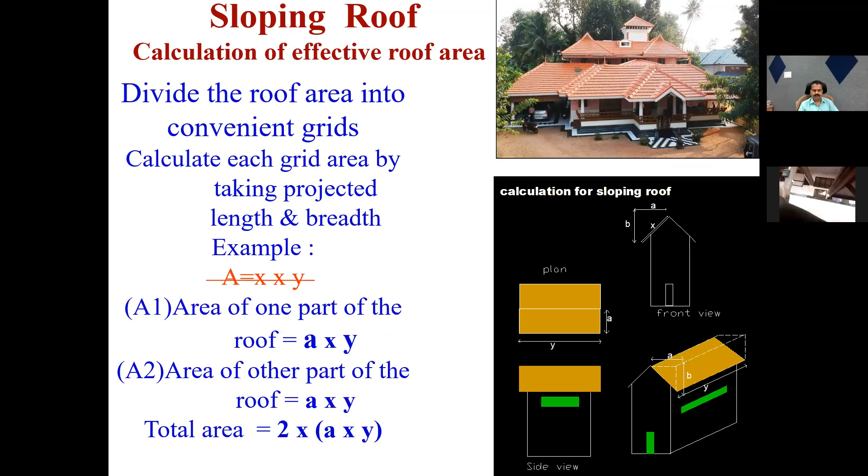Just one example I'm showing here: calculation of rooftop water potential from a 30x40 site, that too an RCC house in Bengaluru city. As we know, 30x40 is 1,200 square feet. If converted to square meters, that's 112 square meters. It should be multiplied by the annual rainfall of our place, that is 900 mm, which is the annual average rainfall of Bengaluru city.

Then it has to be multiplied by the coefficient of runoff, because whatever rainfall falls on your roof or surface, definitely will not give 100% yield. It has to be multiplied by some runoff coefficient depending upon the type of roof or surface, type of land, or even road surface. If you multiply the area, rainfall, and runoff coefficient, you will get the potential of rainwater.

If you take 112 square meters, that is the 30x40 site, then 0.9 meters is the rainfall - converted to meters because units should match - and 0.8 is the conversion factor because we are using RCC, since the roof type here is RCC. For RCC, 0.8 is the conversion factor.

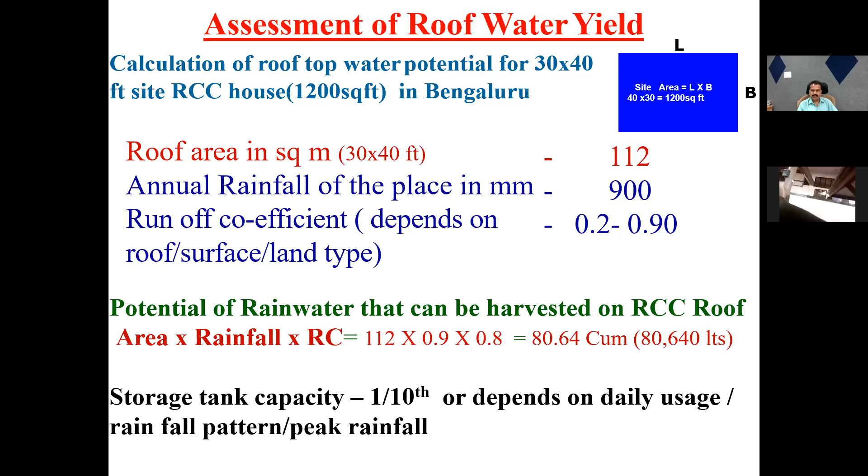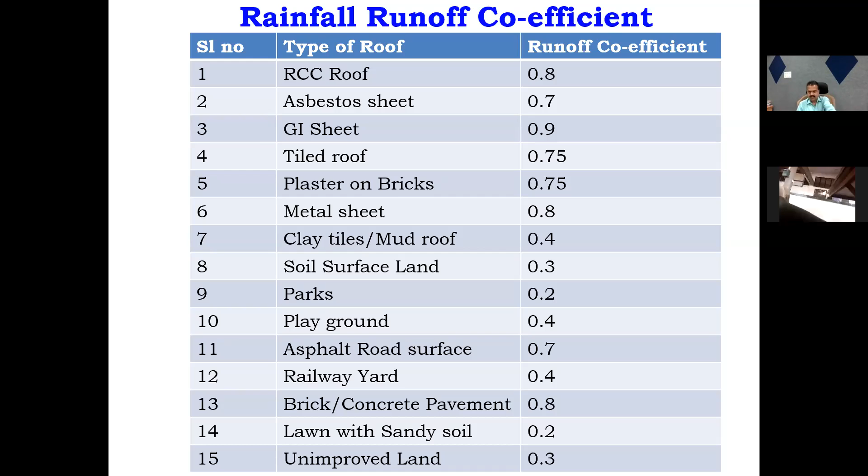So how do you design the size of the storage tank? It all depends upon the number of persons in the house or office. If it's for office or even industry, the number of staff, then per capita consumption or per day consumption, for whichever purpose it is being used, then the number of days for which water is required - that is the number of non-rainy days and rainy days.

For example, if you take drinking water requirement for a household with 5 family members for the period of 8 months non-rainy period, if you get 4 months rainy, at the rate of 6 LPCD, that's 6 liters per capita per day: 5 into 240 into 6, around 7,200 liters, or say 8,000 liters capacity of storage tank you can have for rainwater harvesting for a single family.

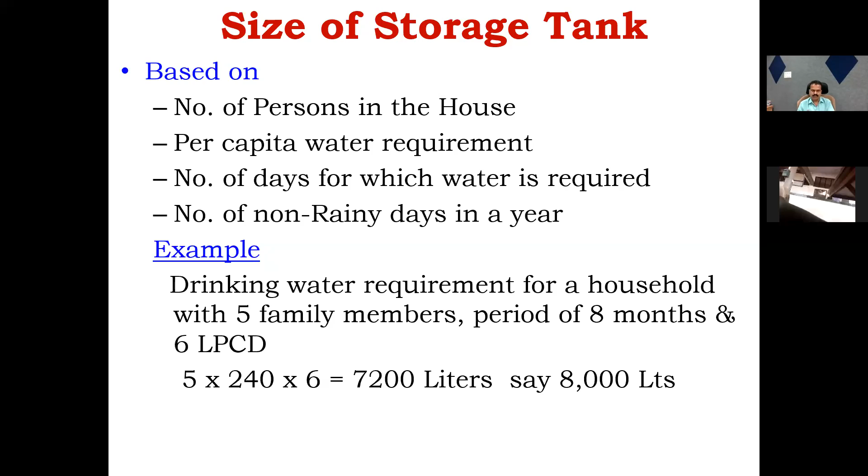Of course, I will list here the uses of rainwater harvesting. As we know, rainwater can be used even for domestic purposes, including drinking and cooking. After testing its quality, it can definitely be used for secondary purposes, including gardening, nurseries, flushing, washing, industrial use, irrigation, even fire control uses also.

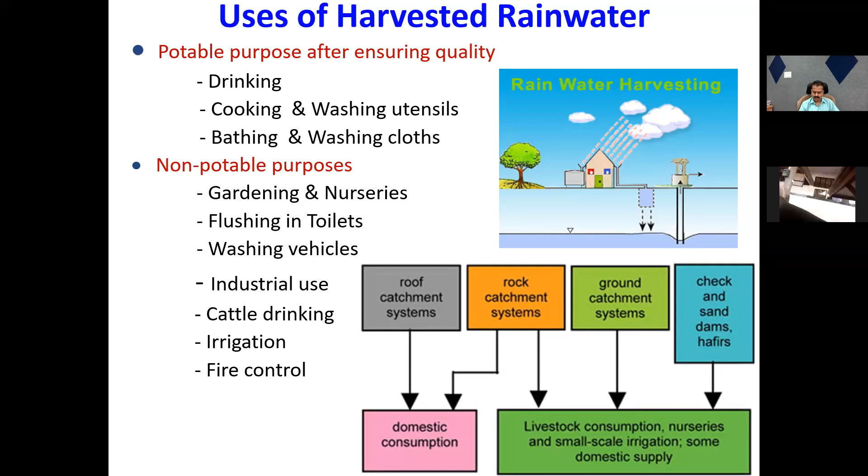And what are the advantages of rainwater harvesting? Environmentally, as we know it is environment friendly, so a lot of energy can be saved. Economically also it is viable, very simple and cost effective, as already shown in the previous slide. It minimizes flood control, which also minimizes soil erosion.

Definitely, it will augment the water supply of both urban as well as rural water supply. So it is one of the augmented and alternative techniques of water storage as well as supply.

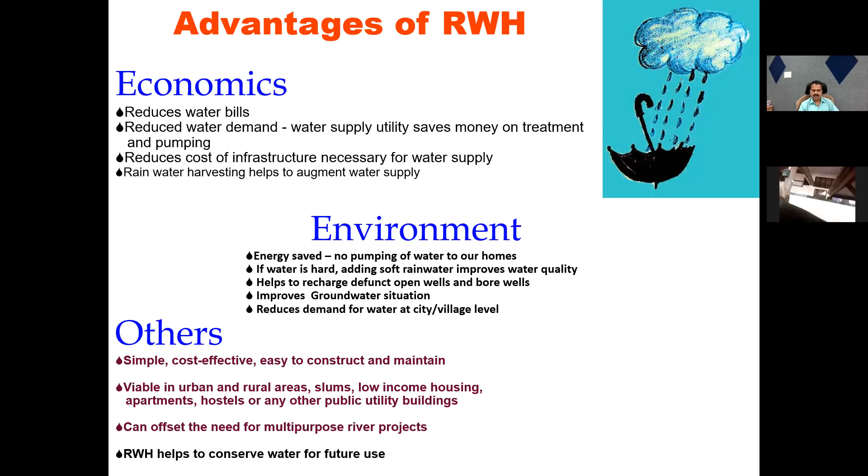Then what are the measures for maintaining the rainwater harvesting system? I've given some very indicative measures. All main components of rainwater harvesting, starting from your catchment area to storage tank, that is your roof, channelization, conveyance, filtration, and storage should be clean and maintained properly at regular intervals.

If you take the catchment area, that is your roof type or surface used for harvesting, it should be clean, free from dust, debris or dirt. It should be cleaned very regularly. It should not be painted; it can be coated with lime. Lime whitewash is very ideal, which acts as an antiseptic material.

Also, the roof should not be used for toilets either by humans, pets or birds, because we should avoid bird droppings as well as pet droppings on roof types. If it's there, it should be cleaned very regularly.

Provide proper gratings and filters at the mouth of each drainage pipe or gutter, which conveys water from the roof to the storage tank. A provision for a first rain separator should be made to flush out the first rains, which carry a lot of debris and dirt.

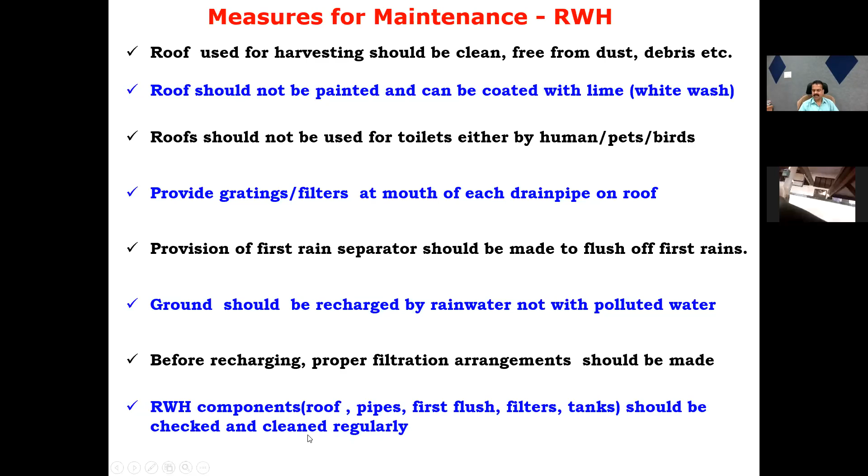So, as I told you, roof, conveyance pipes, first-flush filters, and the tank should be checked and cleaned properly and regularly. With this, I will conclude my talk. So let us harvest rain, store water, and rejuvenate our ancient water bodies which were constructed by our ancestors and elders to conserve water for future use. Thank you very much.